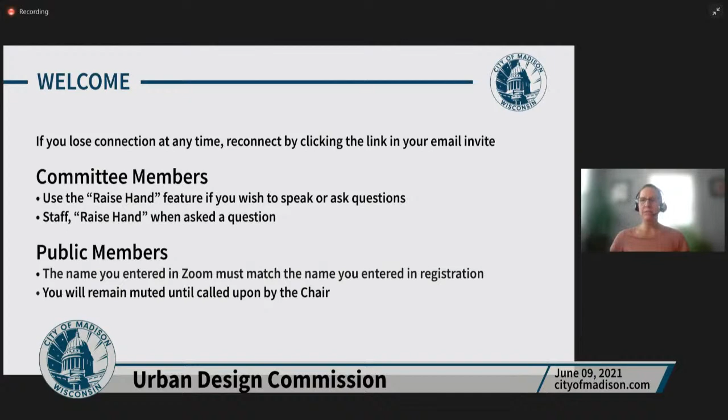Chair, the floor is yours. Okay, thank you. First order of business is approval of last meeting's minutes. Do I have a motion and a second? Okay, moved by Craig, seconded by Tom. All right, we've got approval of the minutes.

Fantastic. Okay, next order of business is, I believe, find my agenda here, public comment. I did not see any registrants for general public comment. All registrants are registered to speak on items that are further down our agenda.

Next order of business is disclosures and recusals. Any disclosures or recusals? I have a recusal on agenda item number 3. So at that time, I will ask Craig to please fill in for me.

Okay. Let's see. Janine, could you give us a brief agenda overview, please? Absolutely. Thank you, Chair. Okay, this evening's agenda for Wednesday, June 9th.

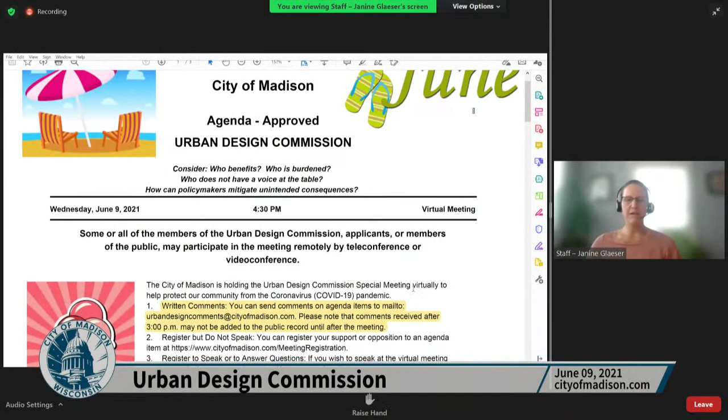We wanted to make a note to the public. Written comments for agenda items you can send to Urban Design Comments at City of Madison. Please note that comments received after 3 p.m. may not be added to the public Legistar file until after the meeting.

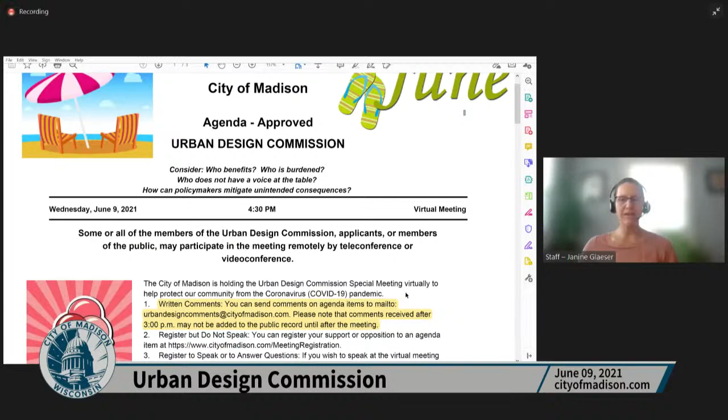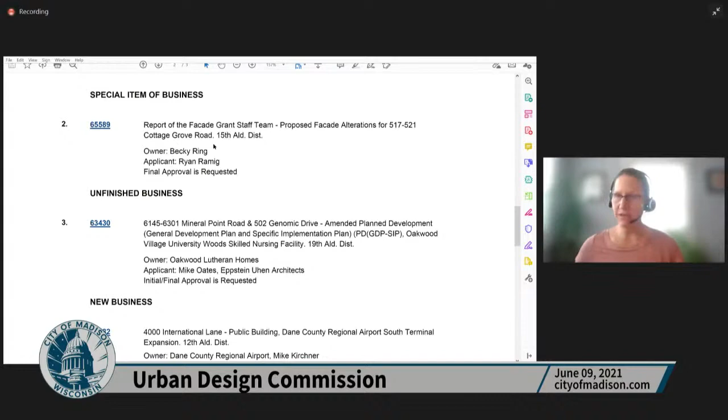Fast forwarding to the next page, the chair noted that we didn't have public comment under item number 1. So under special item of business, we have a report of the facade grant team for 517 through 521 Cottage Grove Road. Final approval is requested for this item. You'll notice that there's a UDC staff and facade grant team report in your packet, outlining the recommendations. Staff is recommending this item for consent.

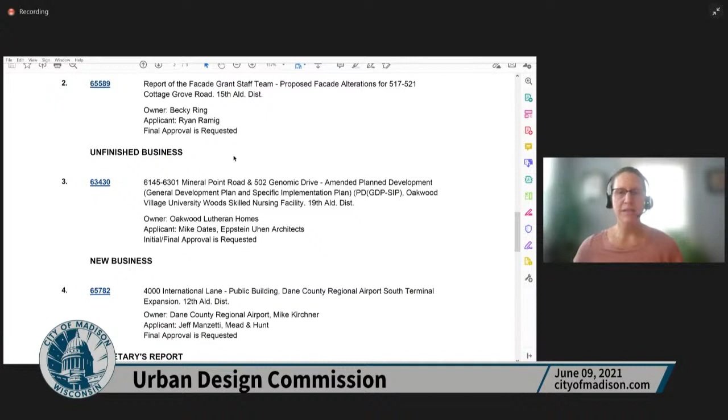Item number 3 under unfinished business is 6145 through 6301 Mineral Point Road and 502 Genomic Drive. This is an amended planned development requesting initial final approval. The UDC saw this item back on January 13th of this year for an informational review. If this item receives at least initial approval, it will go on to the Plan Commission on June 21st. There's a staff report in your packet outlining some of the PD conditions, as well as some of the notes from that informational presentation. Under new business, item number 4 is 4000 International Lane.

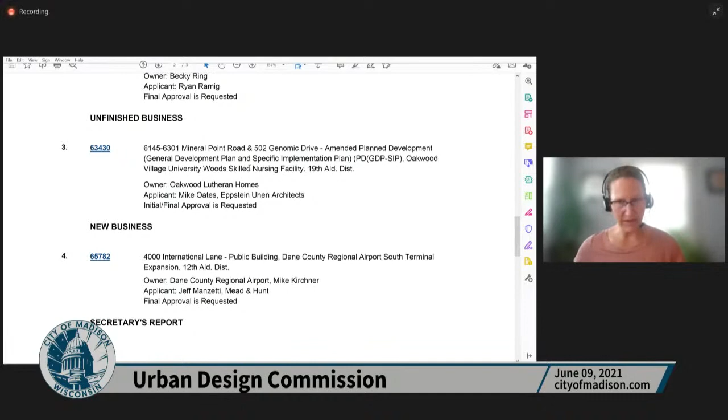This is a public building for an addition at the Dane County Regional Airport. This is one of those items; it is a public building, and typically staff might be able to review this at administrative level, but those powers are not outlined in the ordinances at this point in time. Therefore, it has to go before the commission. They're requesting final approval, and staff is recommending a possible consent item. That's this evening's short agenda.

Thank you. Okay, thank you. Commissioners, as you heard, staff suggested that items 2 and 4 could be potential consent agenda items. Is there a motion for either one of those or both for the consent agenda?

Lois? Yeah, I would recommend that items 2 and 4 are consent. Okay, is there a second? Craig? Okay, I'm gonna just lower hands, and if anybody wants to discuss that, Tom, I'll unmute you. No? Okay, so no further discussion on those motions. If I don't see any other hands, by unanimous consent, then items number 2 and 4 are approved on our consent agenda. That then brings us to agenda item number 3, which I will be recusing myself on.

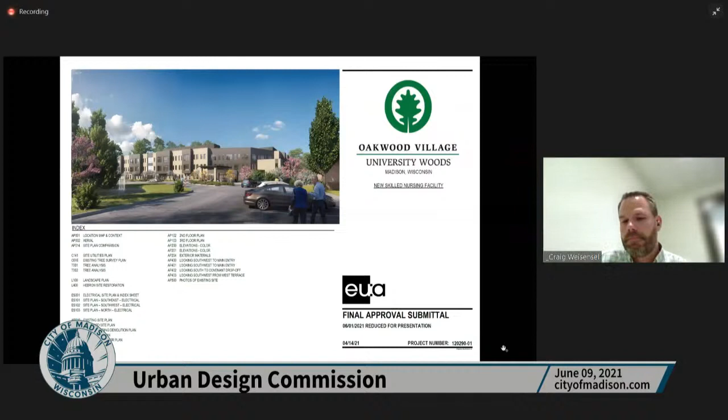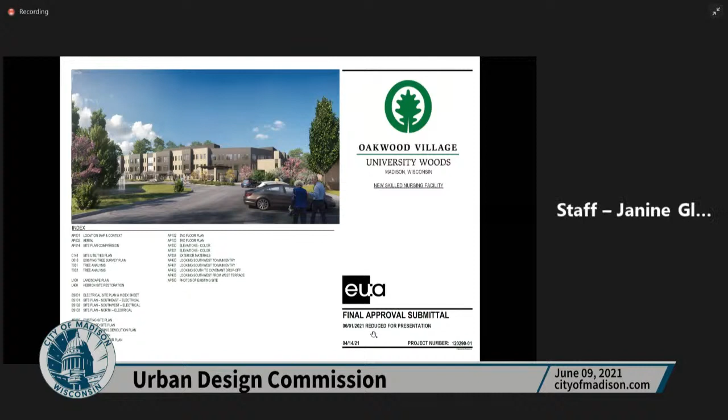My name is Reg Hislop. I am the Chief Executive Officer of Oakwood Village, and I'm here tonight with the design team to address the project in front of you.

The project is a replacement project of an existing building on the University Woods, Mineral Point. Some folks refer to it as Oakwood Village West Campus. We are looking to replace the existing facility known as Hebron, which is a skilled nursing facility, with a new facility. This facility is smaller in scale than the original facility.

It is going to be comprised of 5 patient wings, 4 of which will be specifically relegated to a skilled nursing facility clientele - so primarily a post-acute, recovery-oriented rehabilitation clientele. And 1 unit will be relegated for a hospice palliative care clientele or patient type, which are folks that are in the end stages of life.

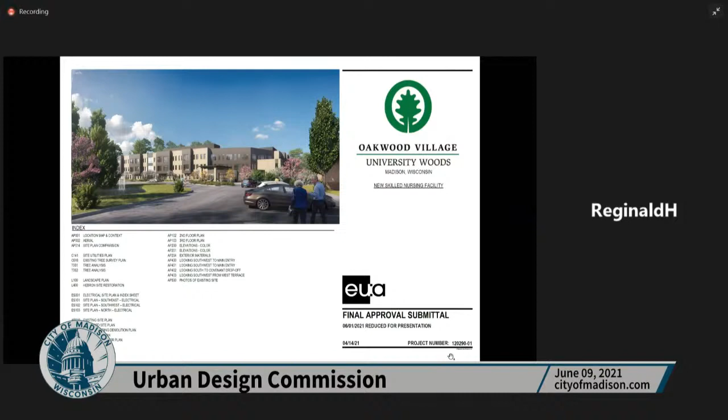Can you advance the slide for me, please? So by reference, you can see the site. The first visual to your left is Madison. The green dot down below is the Oakwood Village campus that we are referencing.

As we zero in, you can see the red dot, which is the exact location on Mineral Point. So the facility that we are looking to locate, or that replacement building, would be towards the southeast corner, southeast access points of the existing University Wood campus. That area today is partially parking lot, as well as some undeveloped green space.

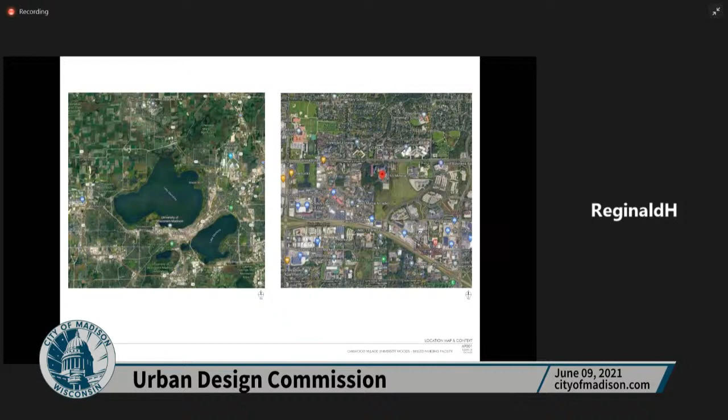Can you advance 1 more slide for me, please? So this is the site itself, and you can see the identified corner there that we're referencing, where that parking lot is, and then the highlighted square is the development site.

The site was chosen for a number of different reasons, but most important, the site was chosen for access or connectivity to the existing University Woods campus. The specific location was desirable given that we could connect to existing infrastructure, support existing infrastructure as we continue to work through the need to demolish certain portions of the site and redevelop certain portions of the site.

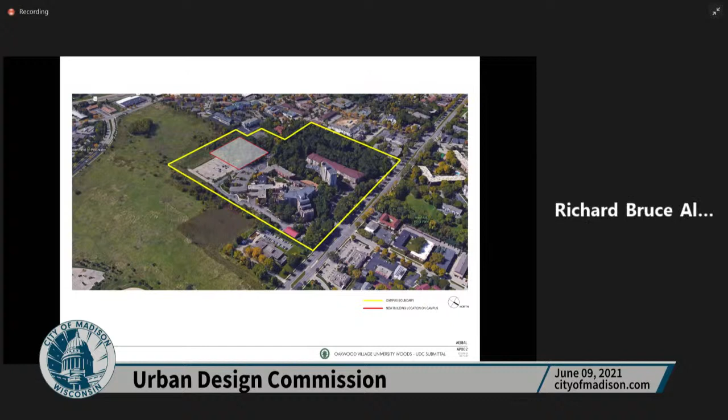So this is phase one. It is, as I mentioned, the skilled nursing facility site. The Hebron building will come down. It will be replaced by green space. The site of the existing building is too tight for any other form of development. We also lack a certain amount of exterior space for green space. The building time cycle is approximately 14 months from start to finish.

There aren't really any changes in terms of employee load, additional parking requirements. As I mentioned, the actual number of residents in terms of this site will be somewhat less than the current site by about 20 different units. So with that, I will turn it over to the next speaker on our team.

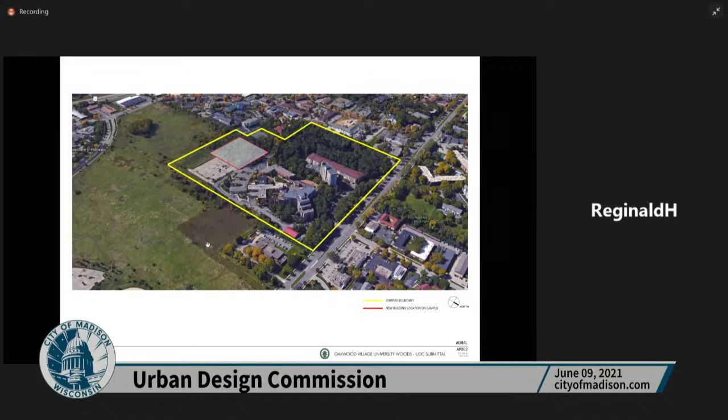Hello, this is Ann Anderson from Mead and Hunt, and I just want to talk about - so I'm the civil engineer - the site components and what has changed since you saw this informational submittal. Can everyone hear me? Yes, we can, thank you. So the site, can you advance the slide?

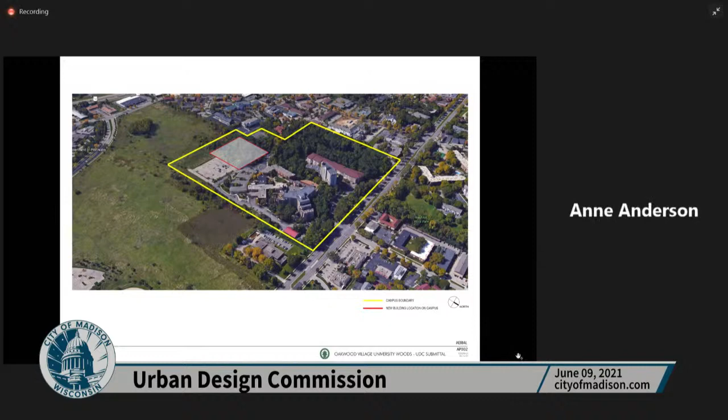There is a slight delay, so... Yep, okay, there we go.

So the previous layout is on the left and the current layout is on the right. Since the informational submittal, we've reconfigured the site.

We're saving a lot more trees. The bioretention pond that was once in a wooded area where we were taking down trees at that oblong drop-off area is now included in the center of the drop-off to save on tree removal. There was a pond in the back of the building, but that pond is no longer needed.

We've removed the connection road that was going through the woods completely, and instead changed that connection to go between the new building and the existing Hebron Oaks building. The parking area was tightened up to have better connectivity throughout the site while maximizing green space.

Most importantly, the building was moved and realigned into more of a 90-degree orientation. With that connector road between the new building and Covenant, the tunnel that connects it—we're basically just driving over that tunnel. So there's that building connection Reg mentioned, but it's all underground. It was more visible in the previous submittal.

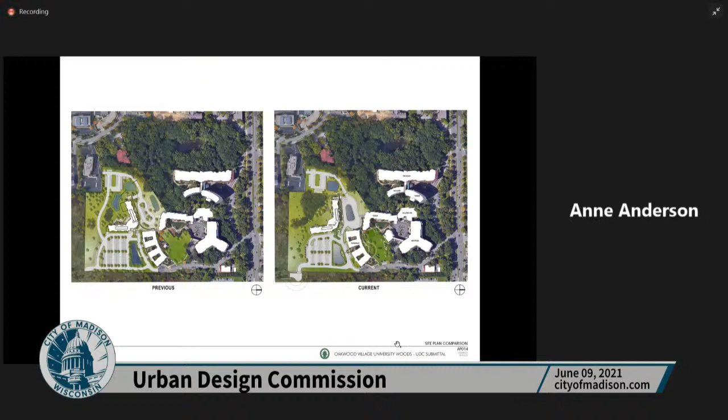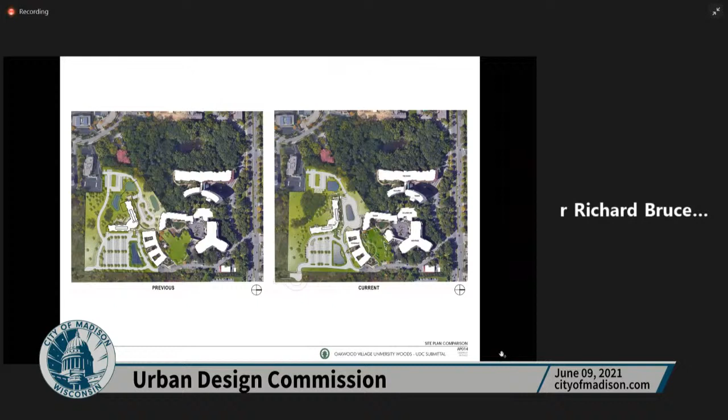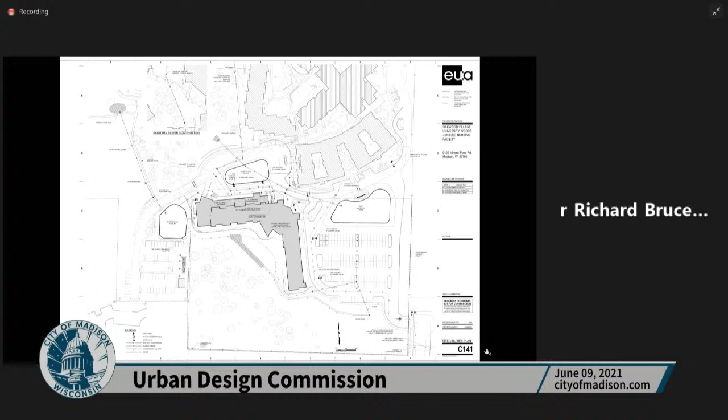Bruce, you should have a prompt to unmute. Good, can you hear me now? Sure can. Oh, good. So I'm Richard Bruce Allison of Allison Tree LLC, could you show my slides now? I can fast forward through the set and let me know when I get to the one you want. Okay, thanks Janine. You'll see a lot of trees. Maybe keep on going. There you are. So go back one, if you would be kind enough to do so.

So what I did was go onto the site several times, and once the plan had changed, which saved quite a few of the forested areas, I tried to identify more carefully the nature of that particular group of trees that would be in the construction area. I did that by taking the basic canopy and identifying just those trees that were over 24 inches, because I was looking for particularly remarkable bicentennial trees that had great historical significance, to see if any of those were in there.

I was able to discover that using a technique developed back in 1976 by one of my mentors, Walter Scott, for identifying the age of a tree relative to its trunk diameter, followed up by a study I did in 2001, using the standard of a 10-foot circumference for a white bur being a bicentennial, and a 14 to 15 for a red oak. I discovered there were no bicentennial oaks in there, but there were 2 red oak sesquicentennial trees and 6 white oaks.

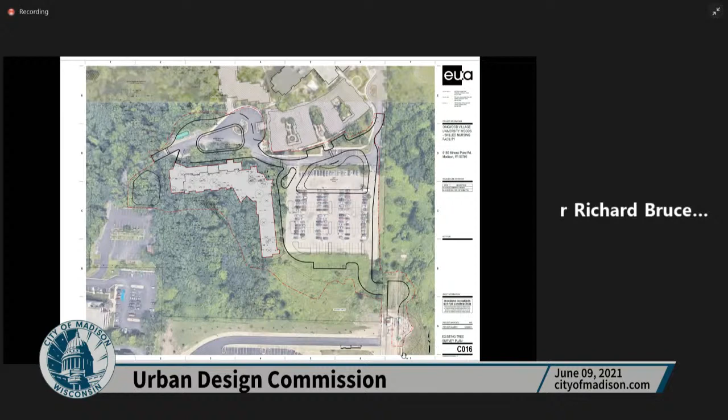I then went a little further to identify the nature of those larger trees, using a technique—the next slide, Janine, will show that graph. Take a look in the upper right-hand corner from the viewer's standpoint.

This is a tool that is very effective in looking inside trees to determine if there's decay on the inside. It's called a micro drill, developed in Germany some time ago, and it sends a 1.5 millimeter drill bit into the tree. The higher amplitude on the graph, to the right as you're entering, shows dense wood. If you go into a cavity, as we did in this particular red oak, it's very hollow on the inside, and that allows me to see that it's very common on the older red oaks to have heartwood decay.

So their longevity is less and more subject to other problems. I took a look at the recycling part of harvesting those trees that had larger bole. I'm very focused on not losing the value of a tree if it has to come down, but rather finding a way to recycle it. For carbon preservation purposes that is very important, but also it enhances the construction going on, or there might be other uses for that wood.

So I've recommended a couple different spots that the wood could go to be harvested. I feel very strongly that they should not just be cut up into firewood, but rather the wood preserved on those larger trees, especially the sesquicentennials.

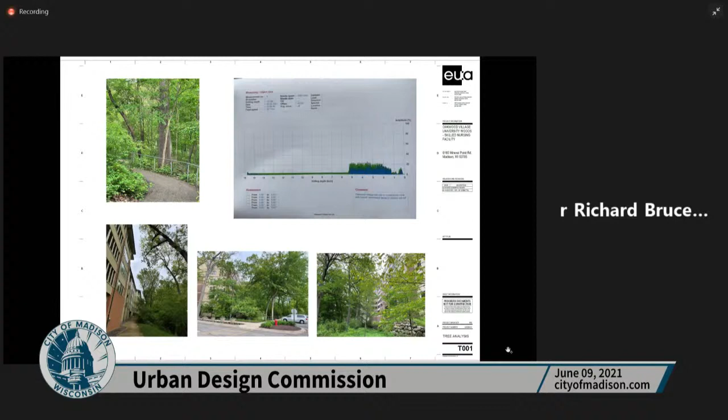Thank you, Bruce. Anybody else from the design team that would like to present?

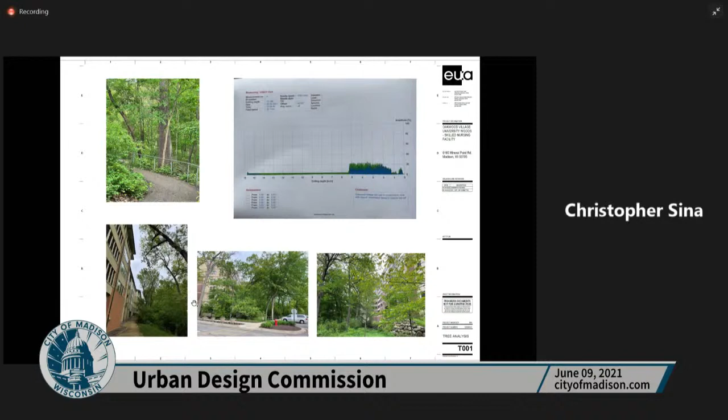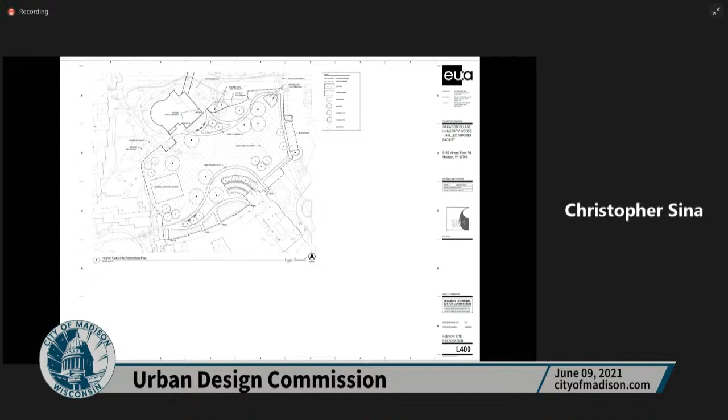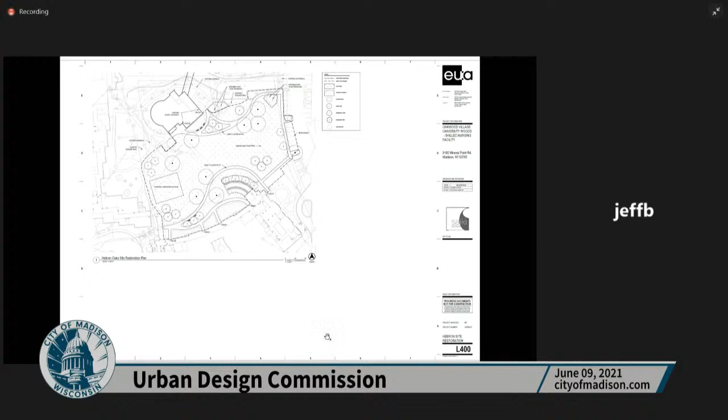Next up is myself, Jeff Bogart with EUA. Janine, if you could advance the slide to the one before the lower level floor plan. Okay, I'll keep going, noting that there's a bit of a delay. Right.

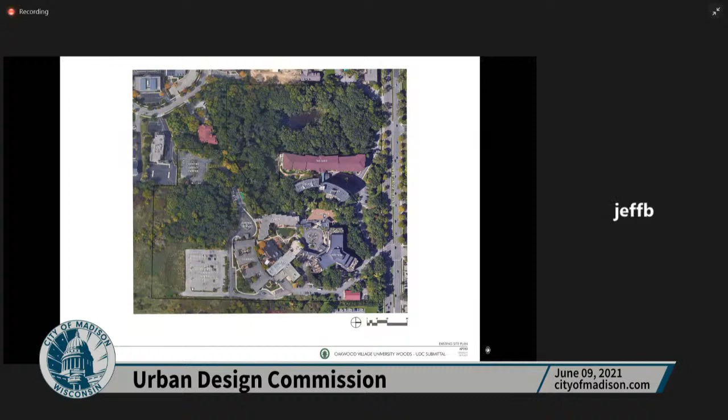Okay, this slide is fine to start. As mentioned in the previous conversation, the chief design changes from the original review submittal are relative to the building location and geometry.

We have relocated the building as far north as possible to pull it out of the wooded area, and we have altered the geometry of the building to make it a 90-degree L shape to further retreat the building from the slope and the natural wooded area. In addition, we have reduced the overall building footprint from the original submission.

In the previous iteration, there was an ambulance bay, a lower one-story projection. We also had a one-story mechanical space that intruded into the hillside, and a more elaborate connector element between the new building and the existing Hebron Oaks at the lower level. We've reduced the building footprint, and by means of the tunnel connection, been able to minimize and reduce the overall footprint.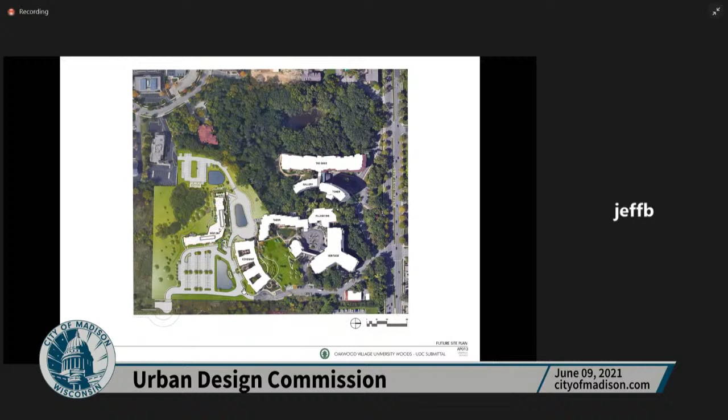All right, just to briefly go through the building programmatic areas. This is the lower level. It is basically set into the slope of the hillside, but exposed at grade on the north side, to the right of the page.

The lower level consists mainly of back of house areas. We have a central receiving and loading dock and a main campus production kitchen, as well as staff support areas and administrative offices. You also see the tunnel connection that connects to the existing lower level of Covenant Oaks, which is being renovated as the campus pharmacy.

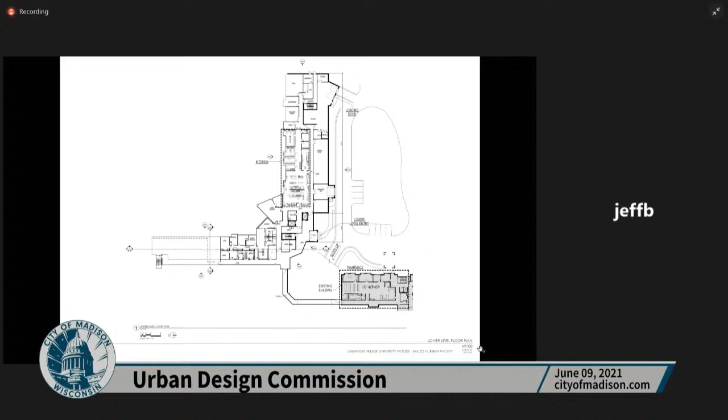We have also located the ambulance bay on this level to keep everything at a service level and a service drive, separated from the upper floor and the main level. Next slide, please.

The first floor consists of a central hub, the main reception area for the building. It includes a small bistro and community room with a covered terrace that overlooks the wooded area to the south. The central service core is a hidden service model which incorporates food service circulation, laundry, refuse, and medical support functions.

The two wings on the first floor are comprised of a hospice dedicated wing, composed of 12 private bedroom sitting rooms with private baths. There is a small den, and a family-scaled living, kitchen, dining area so that families can gather. Proximate to this wing is also a small meditation reflection chapel.

The hospice wing is distinguished from the other typical wings in that, since it is located on the first floor, the lower level provides the opportunity to create direct outdoor access to paved roof areas so families can get a little respite from the hospice experience. There are seating areas and green roofs developed, which is kind of unique to this household wing.

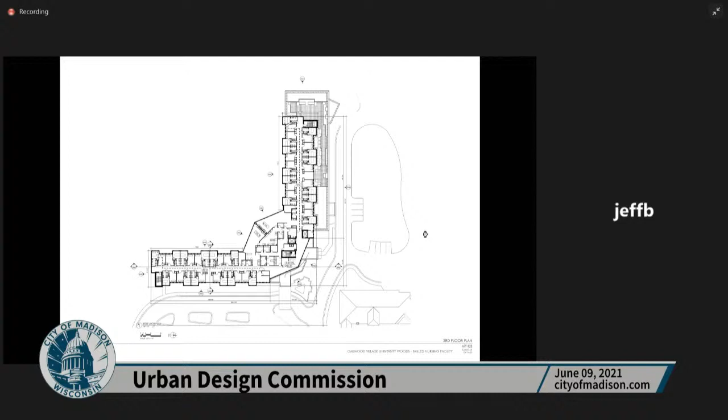So the building geometry has been changed from the original; the curving glass and the multi-tiered hub area in the center core has been greatly simplified. The palette of the building is also quite straightforward and simple.

It consists of two scales of masonry units and vertical fiber cement type siding, so the palette is quite simple. The roof screening elements would be a metal panel. As you can see, the geometry of the building is reflective of the geometry of the resident rooms, with their projecting bays to allow residents a better outdoor connection with larger windows.

So we're basically being stewards of our resources, putting window area where natural light and views benefit the residents versus back of house type areas. Next slide.

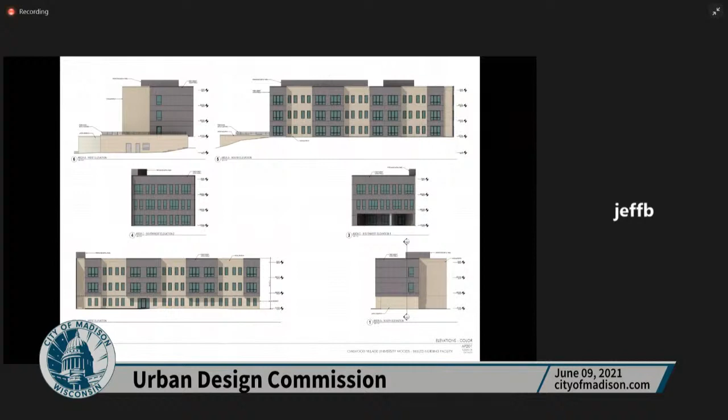To discuss the materials in greater detail, the palette is quite simple. We've chosen two scales of brick: modular, and a larger 4x16 format size in a light buff color. The larger scale brick is at the base of the building, and the modular brick is at the upper levels.

The siding elements are a Nichiha panel vertical expression, and we've deliberately chosen a coloration, grain, and pattern that mimics the bark of the trees, so the building blends in and complements the forested areas and tree trunks beyond.

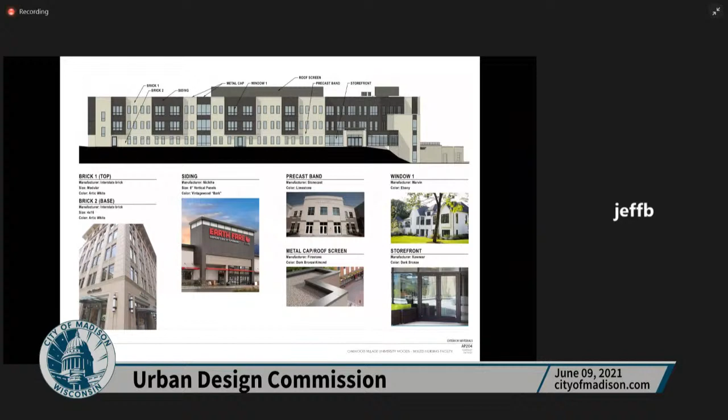There are some precast band elements to separate the base of the building from the upper floors. The metal roof screens the elevator overruns and mechanical units on the rooftop. There are two window systems: a more residential Marvin-type window in the resident rooms, and the central hub core areas employ a storefront window system. Next slide.

Next slide, please. This is the view from the lower level. There would be an entry at this level, and as mentioned earlier, there would be an ambulance bay entry at this lower level as well.

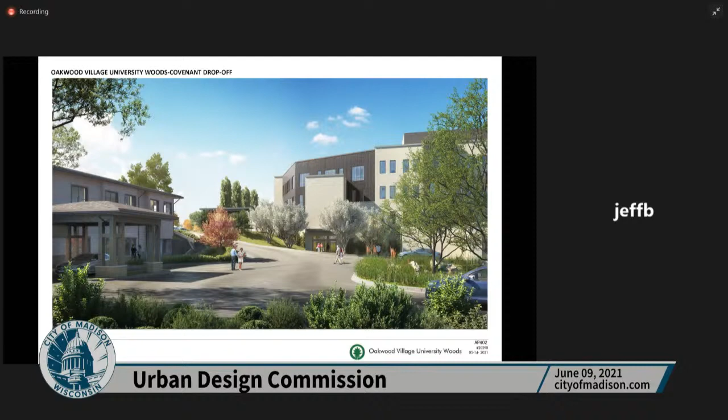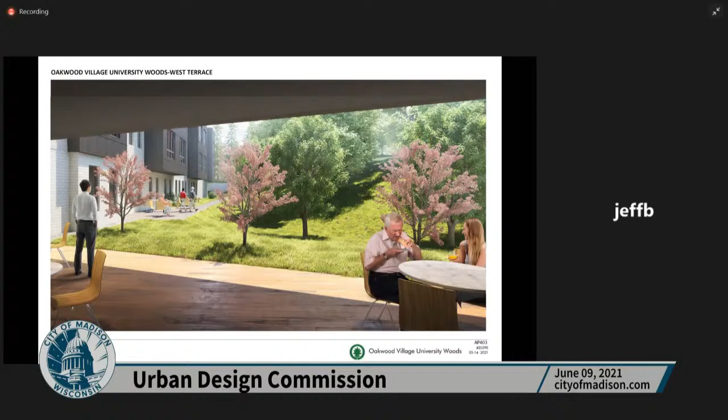The landscape plan is to create a transition from the building's hardscaped areas gradually upward and outward into the naturally occurring wooded area, becoming a transitional zone. The lower level, or this level at the PT department, would hopefully someday also include a therapeutic terrain garden, which would aid in the therapy program.

And I think that is all we have. That was the last slide.

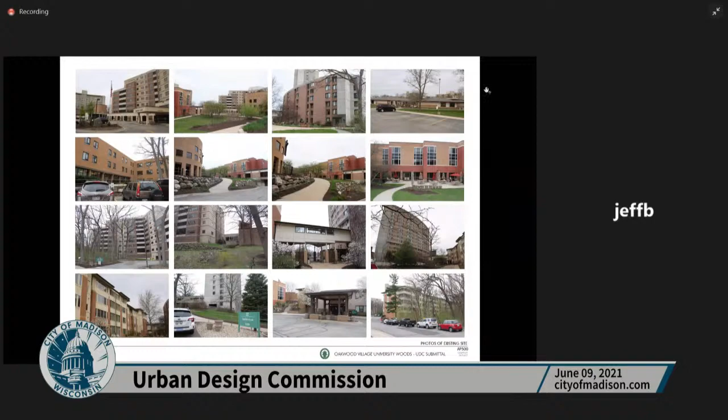Okay, and I believe we are available to answer any specific questions that could be directed to any member of the design team.

All right, thank you very much, Jeff, and the rest of the team for presenting. So it's just a reminder, this is the second time we've seen this. They provided informational back in January, and had a lot of good comments and discussion at that time. By the presentation, they've done quite a bit of work since then, and it looks like they've addressed lots of items that we brought up before.

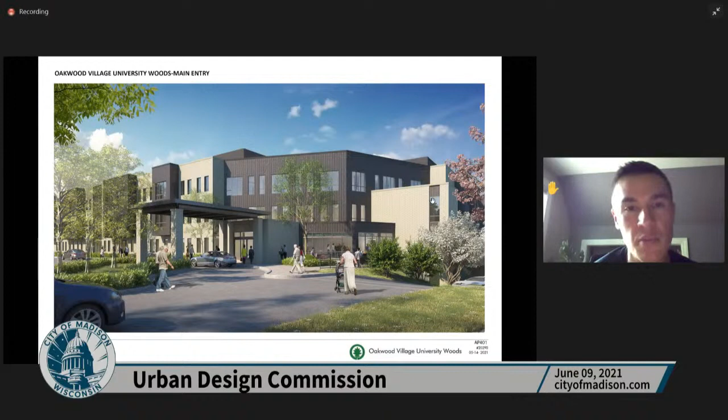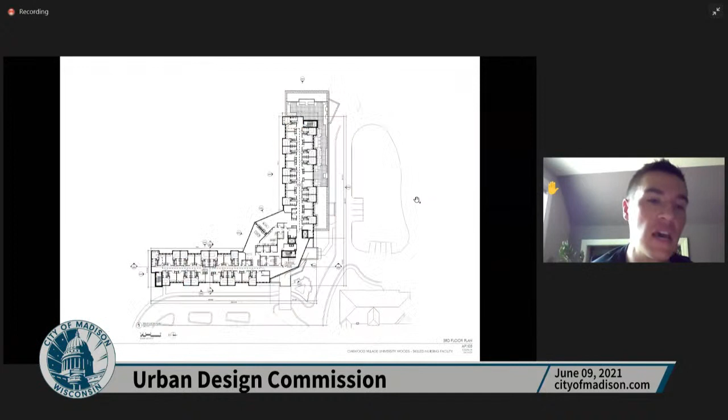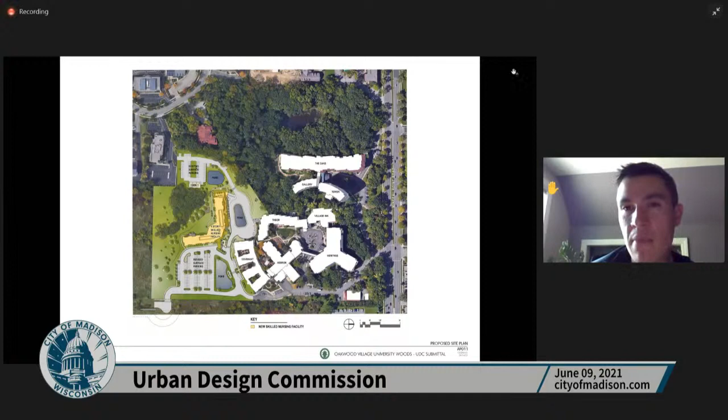One pretty minor comment I had on the landscape plan was just looking purely at the species list in the planting palette first. I was at first thinking that proportionally there were too few oaks relative to some of the other ornamental trees that you had. But I see the intent and how you are placing them in the planting plan, using them primarily in that back hillside area, and I think there's strong logic there in what you've done. I do think that proportionally the number of non-native evergreens compared to your native oaks could sway more in favor of additional white oak species or bur oak species. But I think that's a fairly minor comment overall.

I think the trade-off with some of the big changes that you've made is that there is a little bit of funkiness in that driveway that slopes down between the two buildings. It looked like it was maybe 10% slope, if I remember right, so not a gentle slope necessarily. I think maybe there's a little bit of fine tuning that could still happen in that space so the pedestrian crossings that happen right at the top, all kind of jammed right in there with the drop-off area, work a little bit better. But I acknowledge that was a trade-off of some of the things you did by eliminating the back service road and all of that site work.

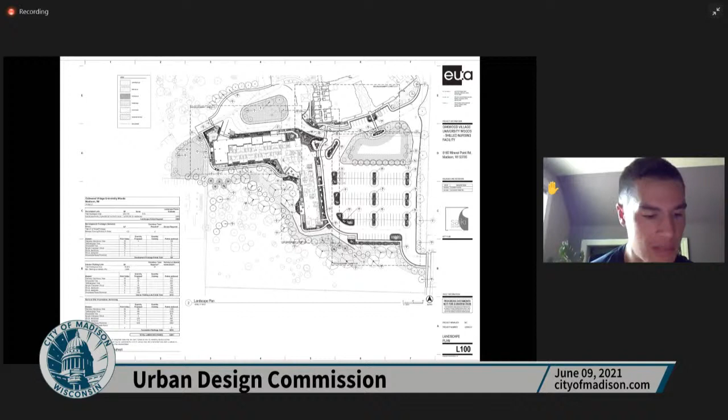A couple comments that include questions here for the site layout. It appears that at the top of the screen we're looking at, there's that large swell area in the paving roundabout, which appears to be probably related to the truck turning movements of some of the service areas in those bays. I'm wondering if you could confirm that, and that's why the site disturbance kind of swells into that north natural area as much as it does. Second, just to the right of that in the northeast corner of that roundabout, there's a lot of pavement there, like 75 feet wide. I'm wondering, is that part of a truck turning movement, or is there any way of tightening that up so there's not so much asphalt paving down in that loop? So yeah, I think that's it for my comments, just those two questions. If the design development team could answer, that would be great.

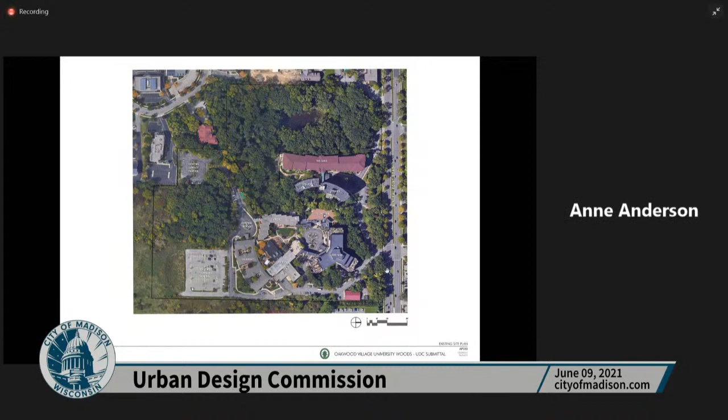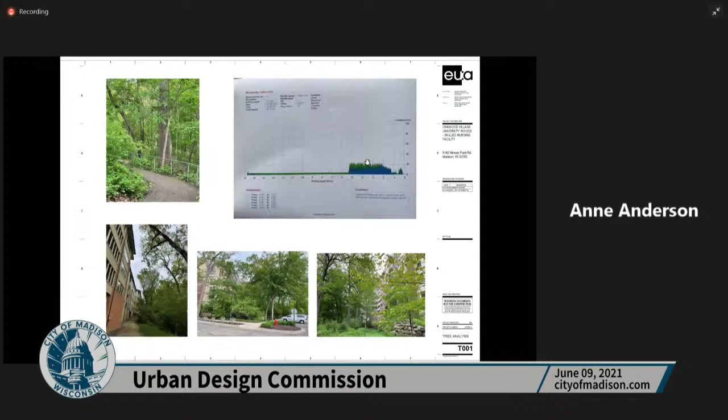Janine, if you could unmute Anne. Perfect, yeah, I think I am. I can answer those questions specifically. So the site layout, if you want to go back to the sheet that you were on when Shane was speaking, you're absolutely correct about the large swell area. If you want to go to sheet C, C101 possibly, C141 would be the one that he was looking at. Or that one works too. Right there, that works.

So the large swell area on the north side, what Shane was calling the roundabout around that pond, is for truck turning. The truck dock area is at an angle, so trucks come down that connector road, turn right, then back in and get out. That's all for truck maneuverability since they have some large delivery trucks. We wouldn't have added all that extra pavement if it wasn't necessary.

The other area, roughly 75 feet wide, is tricky for a couple reasons. This area is currently a drop-off for Covenant Oaks and for Tabor. Tabor is directly north of the pond, and Covenant Oaks has those two enclosed courtyards. Those drop-offs are going to be maintained, so to get truck turning movement while keeping those drop-offs, that's why there's so much pavement. The Covenant drop-off has an overhang with foundations that remain, so trucks can't go underneath it or they wouldn't be able to turn and get out. To maintain that access and still have truck turning movement, that's why that area got so large, unfortunately.

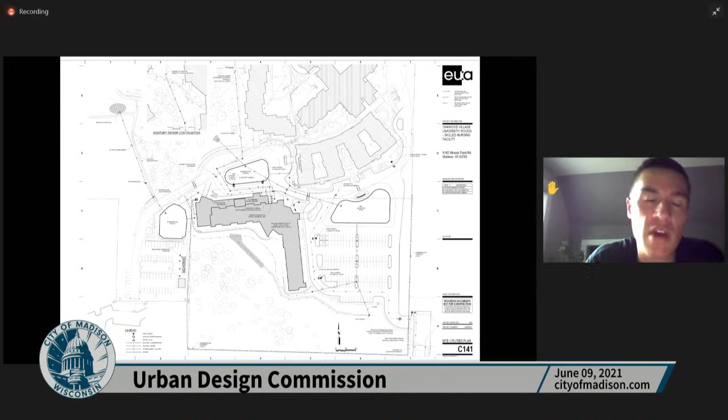Thank you, and thanks again for the diligence in evaluating the trees. Absolutely, it was a team effort. All right, thank you, Shane.

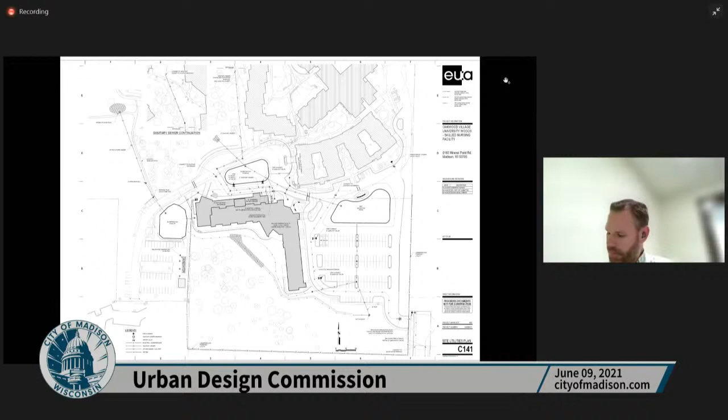I would second Shane's endorsement of the care taken to change the building configuration to protect more trees - that's responsive to what we said last time. A question I have might be for Janine: do we have the perspective of the last version, the original we saw several weeks or months ago? Specifically, I'm trying to recollect the architecture of what I call the knuckle, where the two wings meet at the central service core. That part of the building seems to have changed fairly dramatically design-wise. There were things we liked about the previous design, and I'd like to see visually the before and after, if that's available, Janine.

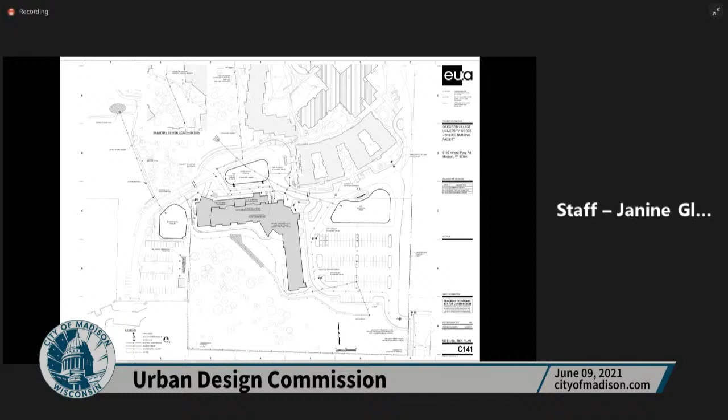I don't know, it can be, if you give me a minute - it has changed quite a bit. Okay, two minutes. Yeah, if somebody else wants to ask a question while you search that out.

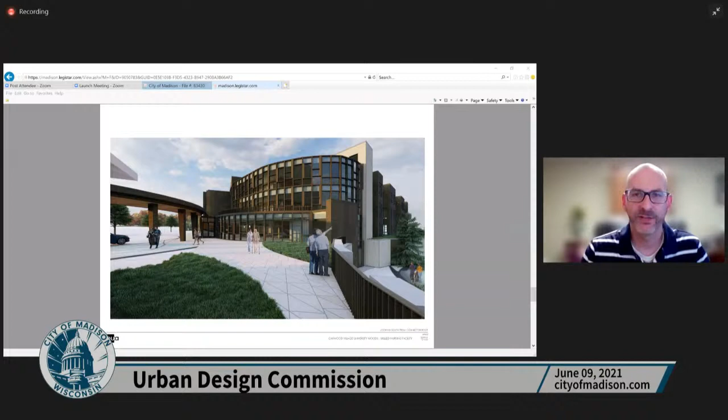Sure, as far as density, I'd start by advising the commission of the comprehensive plan's recommendation - that's the city's overall recommendation in terms of site density and intensity. In this case, it's recommended for high residential or high density residential, and the parameters are discussed in Janine's staff report. I believe the development as proposed could be considered consistent with that underlying land use recommendation for density.

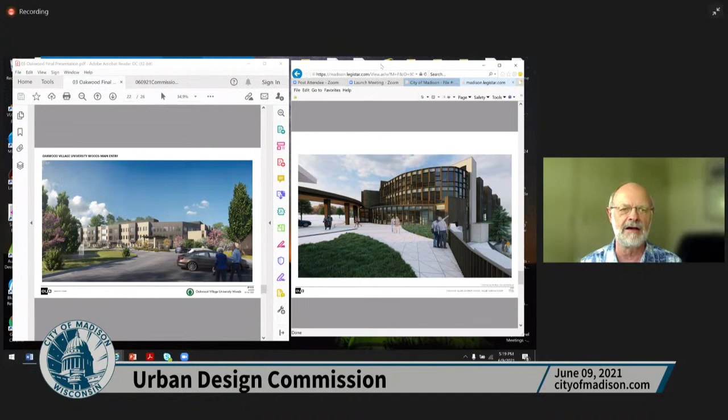Tom, I know Janine just put that picture back up, so you're unmuted again if you wanted to continue. It is as dramatic a change as I was thinking, but I couldn't recall the previous edition. I realize the current knuckle is not curved but more right angle, but there are aspects to this more dramatic original proposal that I like, architecturally, in terms of design and impact and statement. I'm wondering if there isn't some compromise, some middle road that would bring some of that element, particularly the all-glass element at the central core, back to the proposed design, if that's a possibility, or why this initial design was completely scrapped.

I think I could address that. As we were considering being good stewards of the site and of the natural resources, we were also thinking about stewardship of the design relative to constructability and budget. We had a concern that we were getting too much glass area and investing too much in areas not directly related to resident care, and it was maybe a little grandiose. We were also cognizant of greater glass areas raising bird safety glass issues. So as an overall effort in simplifying the configuration, location, and geometry of the building, the constructability, and reconciling budget concerns, we sought to simplify the building.

We retained the basic massing of the wings. It's really just a change in the expression of that hub, which had been a highly expensive, multi-tiered solution designed to relate more closely to the expression of the lower level connector, which has now been replaced by an underground tunnel. So the rationale for that design has eroded with that study. We felt the faceted angles suggested some of the orientation and relationship to other buildings and the geometry on campus created by those buildings. So it was an effort in simplicity, an effort in reconciling all of those resources. I don't know if anyone else on the design team wants to respond to that.

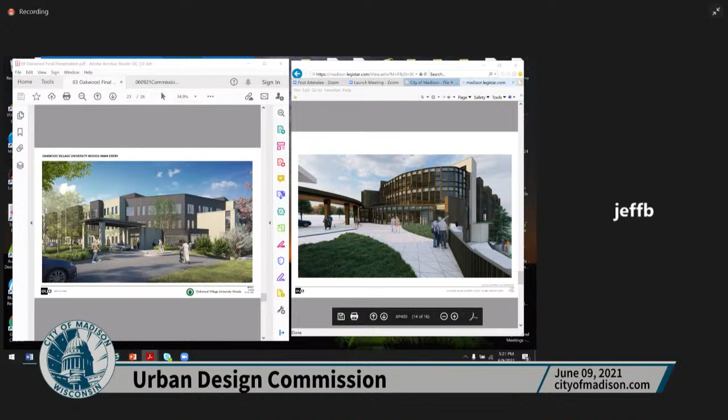I guess I would just ask the designers on our commission whether it feels like the prominent corner - we often look at corners of buildings, granted this is not on a street, it's within a campus - has diminished to the point where it almost doesn't speak to being the nexus of the building. It is the entranceway, it's lost all its prominence. I wonder if there isn't maybe a middle ground that respects budget but gives that corner, that juncture, just a little more statement. That's my response.

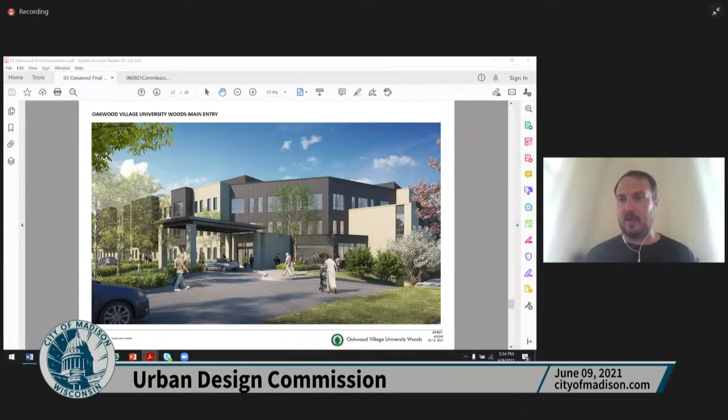And I agree with Tom. I don't believe we're seeing that expression any longer. So I guess a comment there at the end, but if the design team would like to speak to the topic of honoring the context with the rest of the campus and how this design maybe is improved in that way.

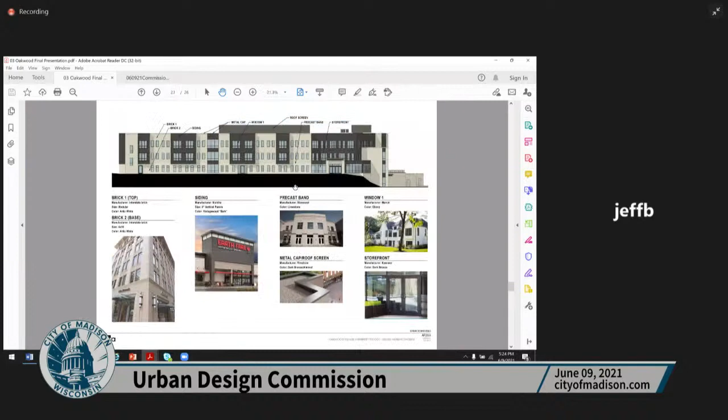Maybe it would be helpful to scroll through all of the images. I think it's also not just about certain views of the building, but the building in context, or the relation of the other buildings and how it settles into the site and creates spaces in between buildings.

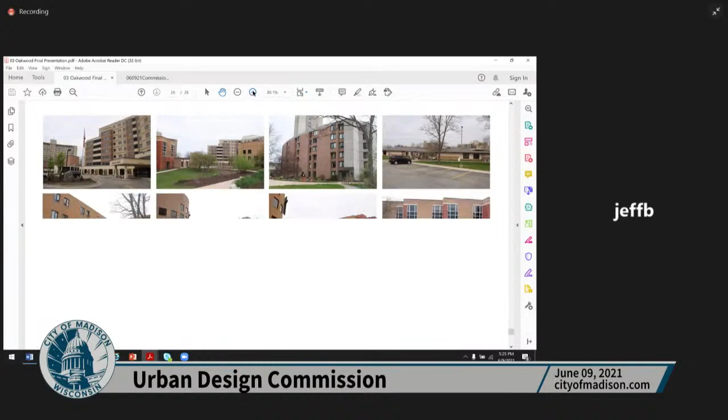And it's really more about, I think one of the things Oakwood is known for, you're not seeing it in these images because of the time of year these photographs were taken, but the sense is that you've got lots of buildings within a very natural and wooded setting. Each building doesn't necessarily have to shout or be the star. Some of them can be the quieter background.

I think it's more about the idea that the form, the geometry, references some of the angles of some of the other buildings on the campus that will remain. There'll be a lot of subtractive happenings or reductions over the course of time as some of the more antiquated or problematic buildings are taken down. So the character of this as a village collection of buildings will start to change over time.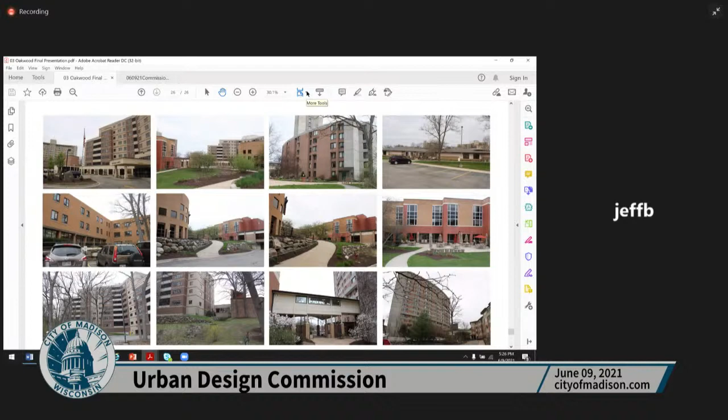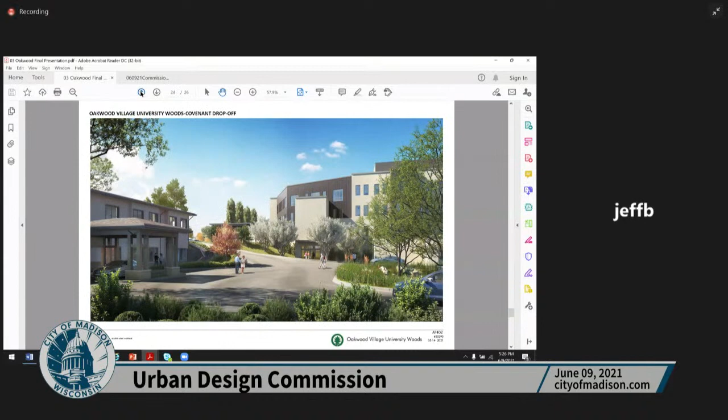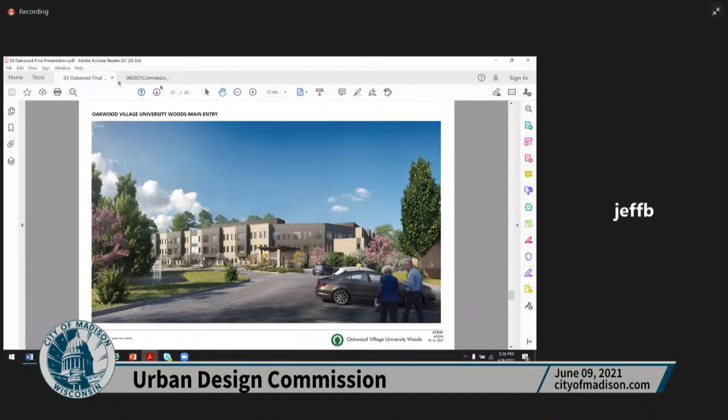So I guess this building isn't meant to be a design star, but it serves a purpose in a very handsome way. It's more of a simplistic, understated statement, perhaps, not trying to be too showy or too glamorous. Again, focusing the resources on the quality of the resident experiences, the private rooms, the social spaces, and so forth, as well as the development of some of the community spaces within the center of the building. So it's not designed to be an architectural statement as much as it is to be just a handsome building for its purpose.

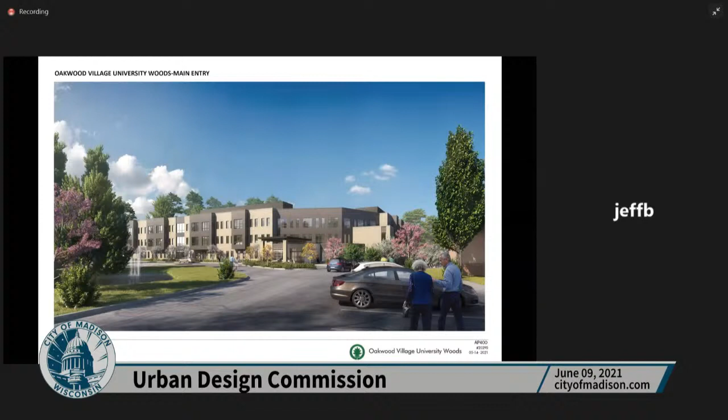All right, thank you very much. I did not see who raised their hand first, so I'm going to call on Rafiq. No, you can let Lois go first because I think we're going to say the same thing. All right, fair enough. There you go, Lois. Or you're just afraid I'll contradict you. I'll let you contradict me.

So, every project, there are push and pulls with what you want to stand out, budgets, everything, the properties or results of having a lot of glass. Then you have to go to the bird glass. And so I can see where, as all of those components are being discussed, I appreciate that the natural setting of this was the priority.

And I actually liked the more reserved detailing of the building. I think the other one with all the facets was getting a little busy for me. So I actually appreciate the restraint, or the more restraint, in the design elements of this building. I think it's a handsome building, and I do appreciate that the landscape was pushed forward and maybe prioritized more.

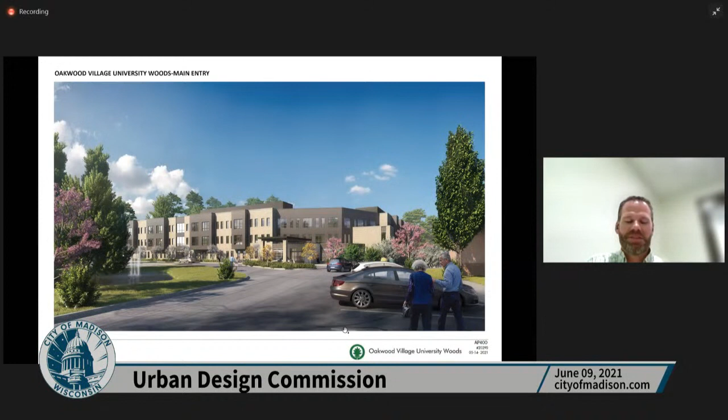Thank you very much. I would say the same thing. This has both been said. Of all the push and pulls on a project, especially one like this, where you're trying to struggle with your resources and where you put features, there is a balance. And I think as design progresses, as Tom said, you see certain things and then they go away and change. But as the overall of what you guys have done here, and kind of tying back to what Shane said originally, there is a lot of comments, and as far as collaboration with the UDC, I think it's very appreciated where this came from originally, and some of the pushes and pulls that you guys did as a design team to get us here.

So Russell, I think you just put your hand up again. I'll call on you.

Well, thanks. I was going to make an attempt at a motion here. I'd like to move that for approval with some of the comments that Shane had mentioned, to try to increase the balance a little more toward the native oaks with some of the new plantings.

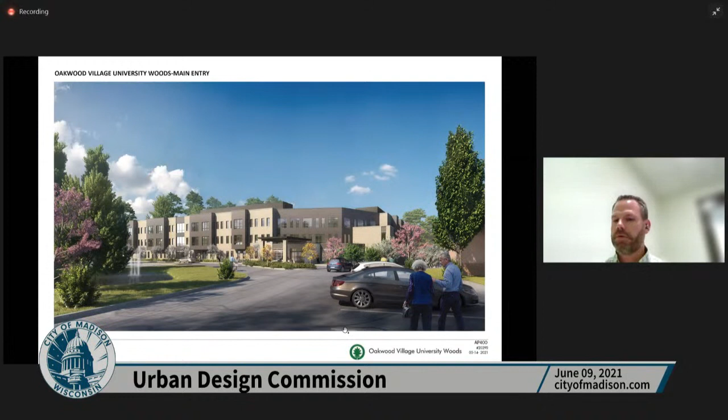Was that an initial or a final approval, Russell? Because they're asking for a combination. My motion is for final approval. Final approval. Okay. And then Lois, is that a second on final approval? Okay, thank you very much. So if nobody raises their hand, I will have this be a vote of unanimous on consent. And it is. So final approval with the one note from Shane for more oaks in lieu of the evergreens.

Thank you very much. Cliff, I will now hand it back over to you. Thank you, everyone. Thank you to the design team. Thanks, Craig.

I was meditating. So that is the end of our published agenda. We do have the secretary's report, and I think it would be appropriate for us to reflect on Janine's service and contributions. But before we as a commission do that, I'm wondering if Kevin might like to lead off from the staff perspective. Thanks, Cliff.

And I do, I'll just keep it brief, but I wanted to say a few words. It's hard to believe it's been nearly 4 years since Janine joined our staff and has been staffing this commission. She's just been an incredibly valuable colleague from planning. I wanted to thank her for her leadership, her initiative, her design sensibilities. She's made countless contributions, not just to this commission, but to the rest of the staff. There's a lot of things she does behind the scenes on other projects. She's been an incredible colleague. She's going to be missed quite a bit, and I want to wish her the best in her new endeavor. So thank you very much, Janine.